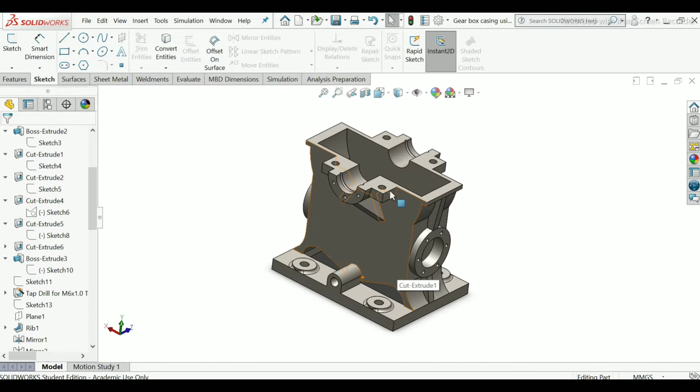I hope you have seen this 3D model that I have already made. Here are some dimensions given below so that you can see it. Let's start to make it.

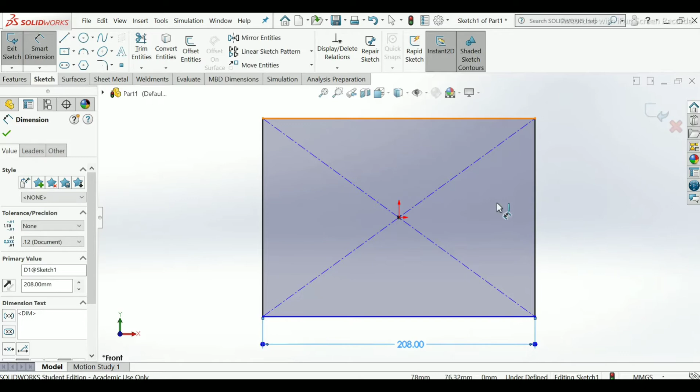Click new part. Select front plane, sketch, normal to profile. Click center rectangle. Apply dimension from here to here. Length will be 208 mm. Height will be 187.

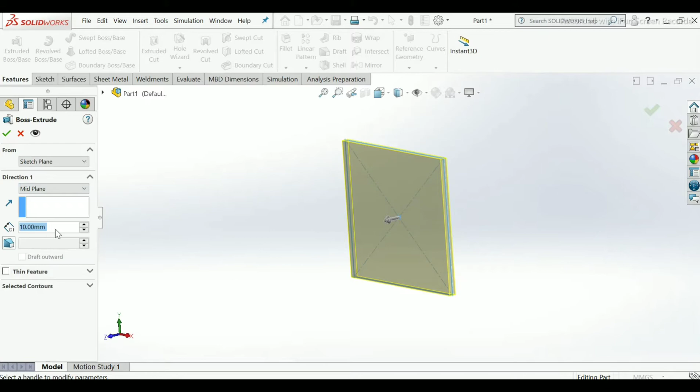Exit. Choose extrude boss base. Select start condition, end condition will be mid plane. Take 152 mm depth. Our preview has been seen here, you can see it.

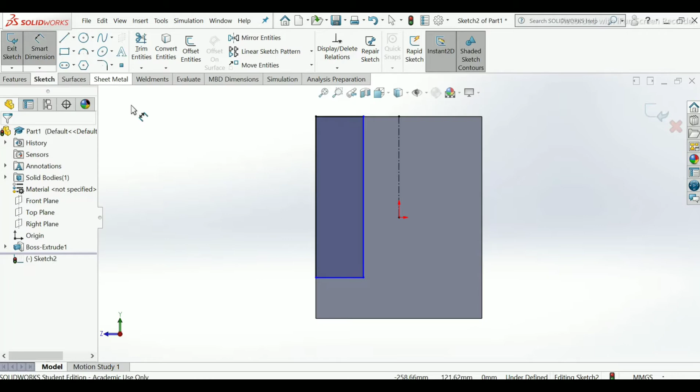Now click on this face, sketch. Take center line from origin. Draw one corner rectangle. Apply dimension. Take 167 mm and this 40 mm.

Click OK. Now we have to make this sketch on here, so I will choose mirror entities from sketch command manager. Select entities to mirror will be this corner rectangle, all lines, mirror about the vertical axis that I have drawn. Select this. Our preview has been seen here in yellow color lines. Click OK. See, it is been made. Now exit.

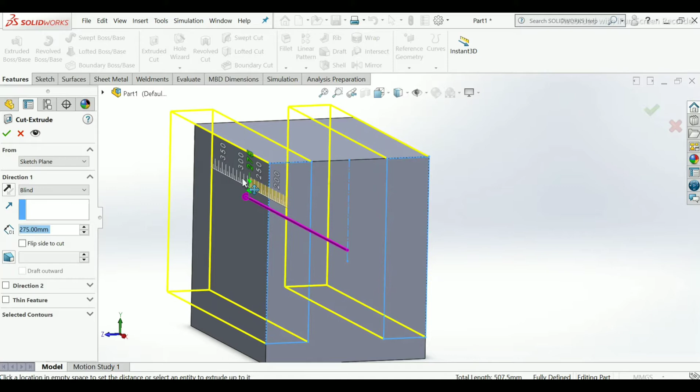Use extrude cut. Drag this arrow to here. Okay.

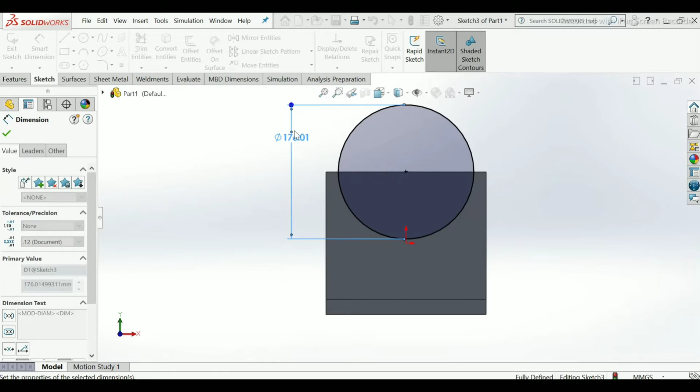Select this face, sketch, Ctrl 8. Select this circle, apply dimension. Take 192 diameter. Okay.

Drag anywhere, click OK. Make one rough sketch of a circle. Make it 80 mm diameter. Okay.

Now add some relations to here till here, so I will use add relations. Select this sketch and this vertex point, coincident. Okay. Again choose add relation, delete this selected entities. Select this arc diameter and this line, make it tangent. Our relation has been applied here.

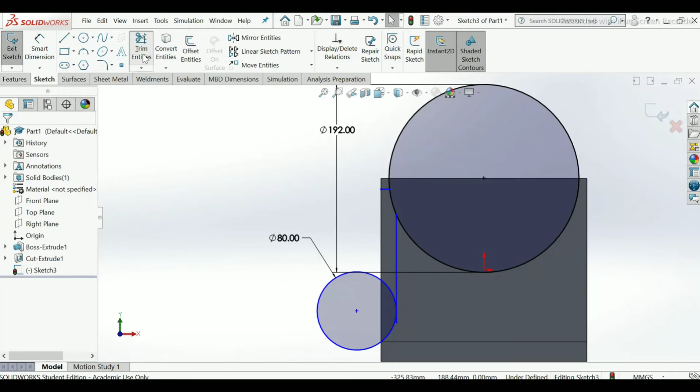Now use trim entities from sketch. Trim the lines. Make sure you will make one here also, a line. Actually it is not made. Now our line has been made. So use again trim entities. Trim this circle and this.

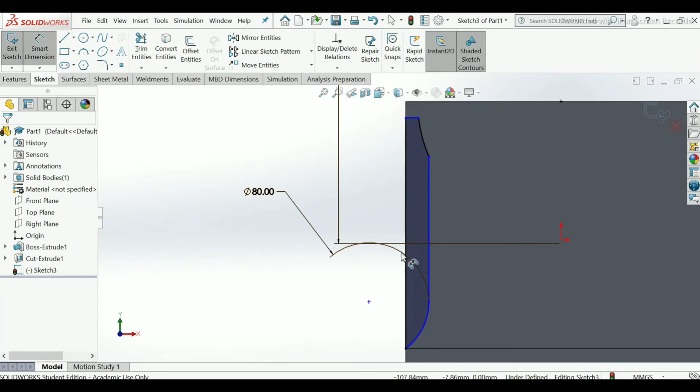Now our sketch is fully closed. Only we have to give dimension here. Take this edge and to this line, make 18 mm thickness. And from here to here take 6 mm. Okay.

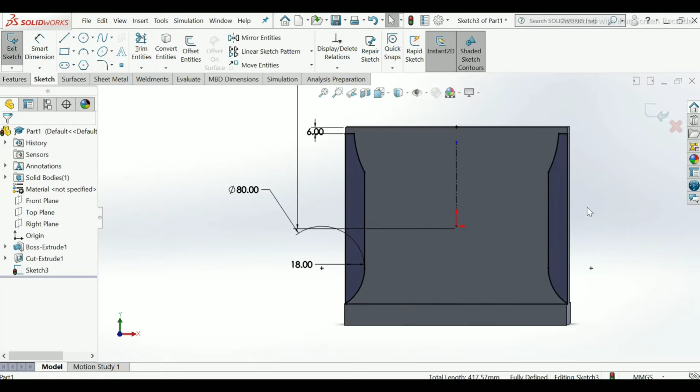Take center line from origin and stop here. We have to make this whole closed sketch to here. So mirror entities, select this sketch, mirror about axis, click OK. Now our copied sketch has been made from here to here. Now simply exit it.

I will use extrude cut, extrude through all, click OK. Now our outer side has been made.

Select this plane, sketch, use convert entities, select this edge and this edge, right click OK. Now offset this convert entities to here inside, so I will use offset entities, select this and this, make this direction reverse, click OK. Delete this 10 mm dimension from here.

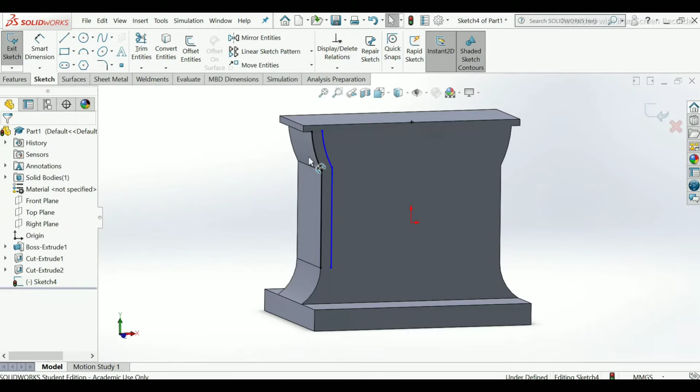Ctrl 8. Make one line from center of this origin. OK. Take 6 mm dimension, take line again, drag one point of the line to here. OK.

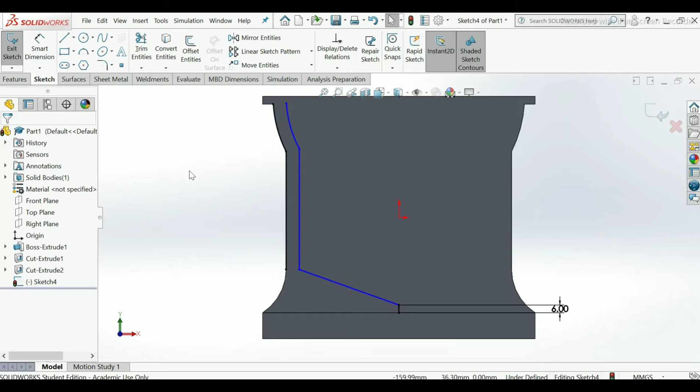Make one fillet, so I will use sketch fillet, select the point, make radius 6 mm, and click OK. Our sketch has been made.

Now again we will choose convert entities and select this top sketch, OK. Not trim, extend entities, we can extend all the lines from here, only choose this arc, right click OK. Use again trim entity, trim this line, OK.

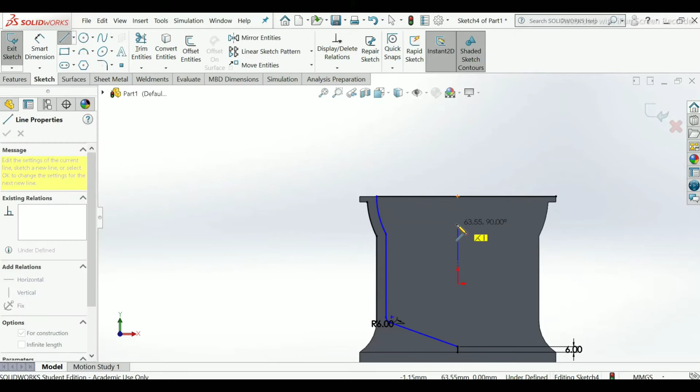Now I will make a center line from point of origin to here, so that we can mirror it easily. For mirror entities, select this arc, this and this, mirror about axis, vertical, OK. Now our sketch is fully closed, we just have to give one dimension, select this and this, make thickness 6 mm. OK.

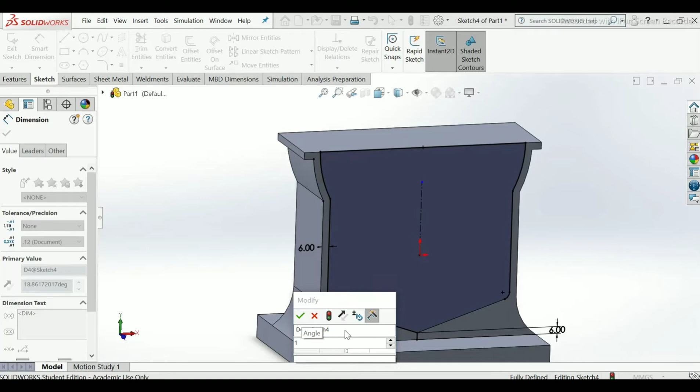Simply hide this and this, make it construction, OK. Make 19 degree, 19 degree, 19, because here we have to give another extrude cut to make a sketch of it, that's why I have given angle 19 degrees. So click OK.

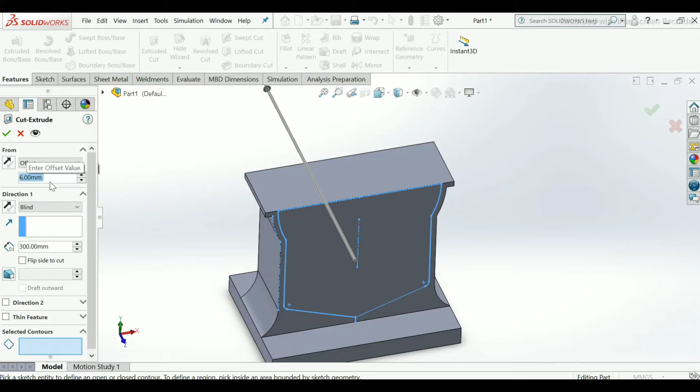Now we have to make extrude cut only in this portion, not through the whole model. So we will use extrude cut. Start condition will be offset 6 mm, select contour will be this, end condition select offset from surface, make 6 mm.

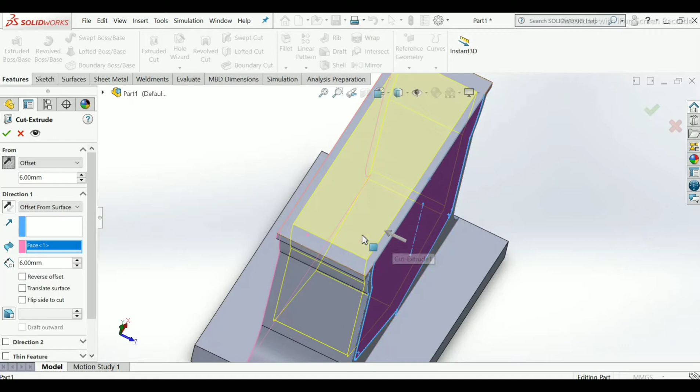Select a surface for this, so select this surface. Now it shows outward from it. Change the direction by choosing this that I have shown. So the direction has been changed to inside. You can see the preview, it cuts only this portion, not this. So click OK.

Now our extrude cut has been done. It cuts the material on the inside portion of the extrusion that I have made.

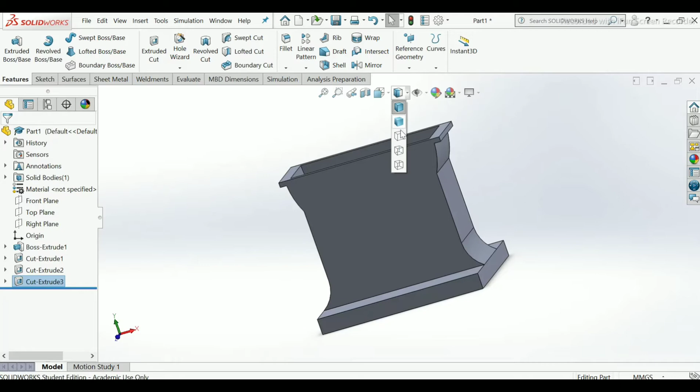So for this portion I have to cut it, so I will use display setting, change it, use wireframe. Select sketch, line, select line, center point, use convert entities for projection, click OK. Now give relation, make it parallel. Now use 3-point arc.

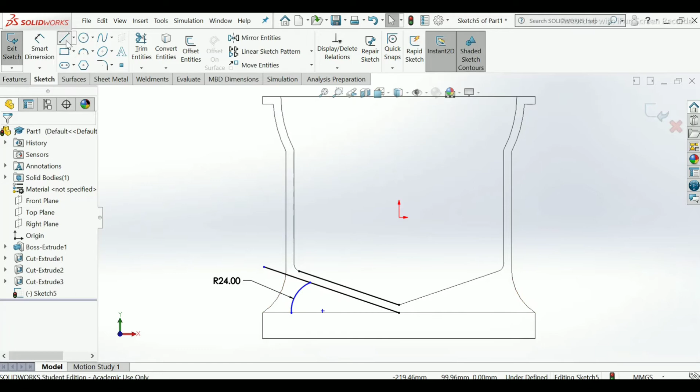Use smart dimension, make it 24 mm radius. Close this sketch.

Use trim. Now add one relation here. Make this and this line tangent.

Give length, it will be 84 mm. Simply you can drag it. Choose center line, select this arrow, center line.

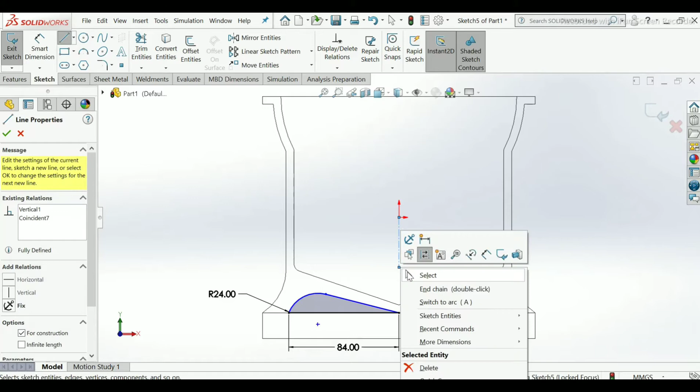Use mirror entities, select this sketch line that is closed, mirror about vertical axis. You can see the preview, click OK.

Now I have to give fillet here from this point, so use fillet, click this point. OK, now our fillet has been made.

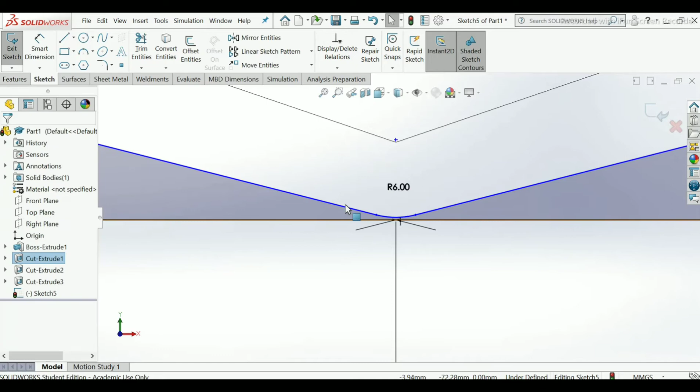Click OK. Use features, extrude cut, extrude end condition will be through all. Okay.

Now change the display style, make it shaded with edges. Our extrude cut has been made.

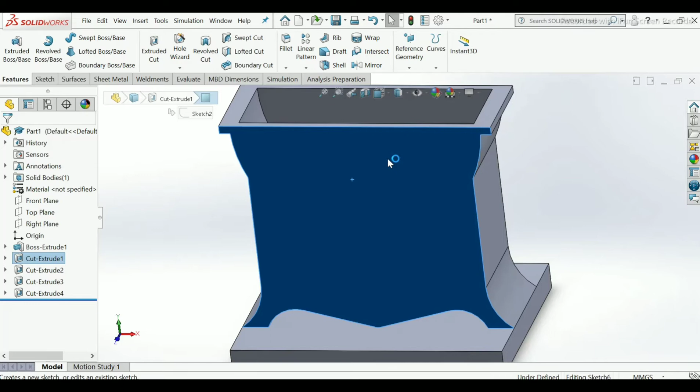Now select this face, sketch, Ctrl+8, make center line, apply circle to this point where center line has been started, make one line to divide this circle.

Now apply dimension, give 36 mm diameter. Okay.

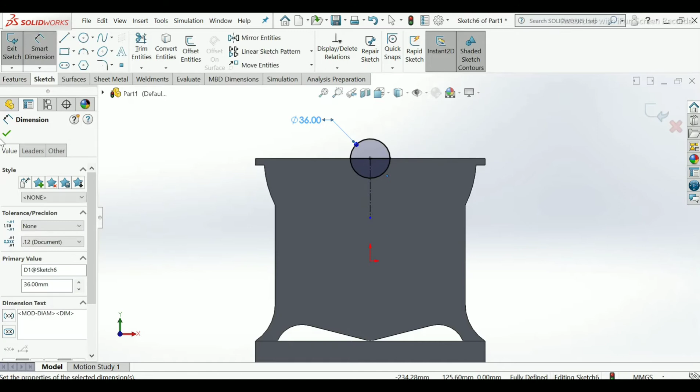Use trim entities, delete this half portion circle. Now we have to cut this portion by using this half circle, semicircle. So click OK.

And use extrude cut from features. Give end conditions through all. Okay.

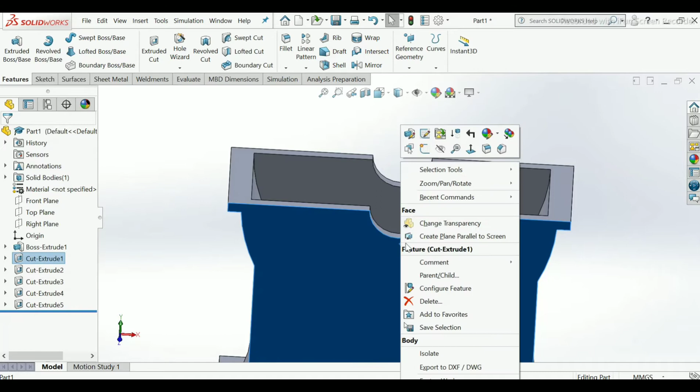Now we have cut this portion, so I will extrude this by using right click, sketch, control 8, use circle command, take center point of half semicircle, take line, draw one line from this point to this.

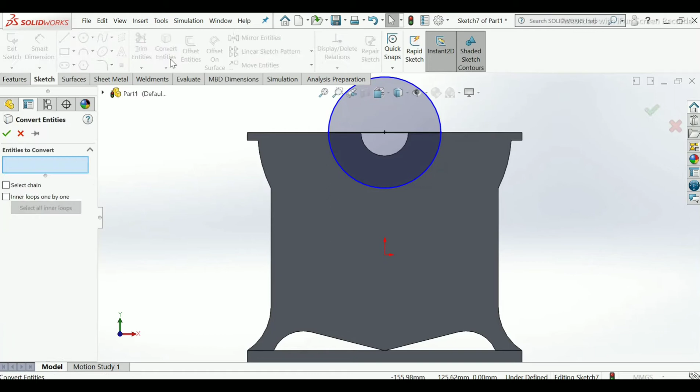Now then use convert entities, convert this semicircle for projection lines, click OK. Apply dimension to this bigger one, that is 64 mm diameter.

If you want to make radius, then you can make it by using right click this dimension, display options, display diameter or display as radius. Now it converts the radius of 32 mm.

Then use trim command again, trim this portion, then click OK. Now our sketch is completed, so exit.

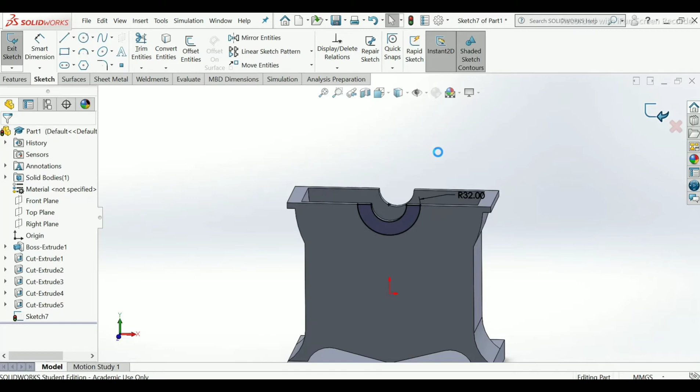Extrude boss up to 40 mm, click OK.

Now use this plane, sketch, control 8, normal to profile, which means use circle, start from this point that I have shown. This is the center point of both the extruded and extrude cut circle that I have made.

Make this circle as construction. Click OK. Apply dimension to this, 49 mm dia. OK.

Choose point from sketch. Give it to this constructed circle that I have created, to make this fully defined.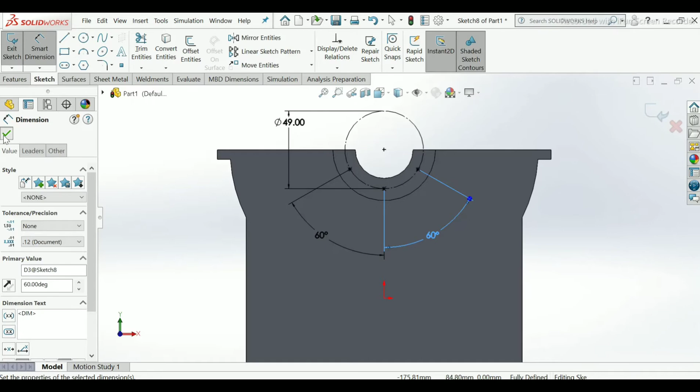Select this point and this, and this third point. Again make 60-degree angle. Click OK. I have made this point to give a hole wizard.

Now go to hole wizard. Select hole. Standard will be ANSI metric. Type will be tap drills. Size select will be M6 into 1 into 1.0.

We can see here custom sizing of it that given.

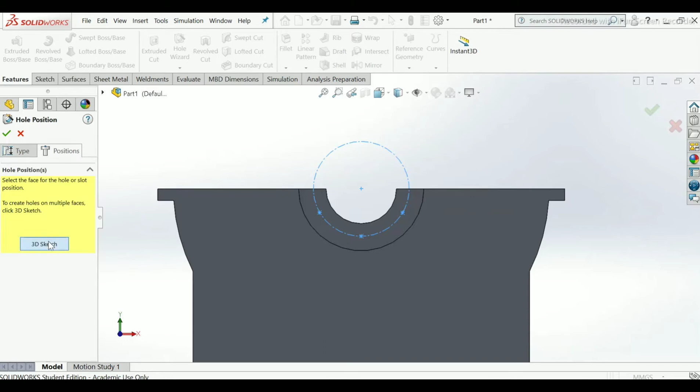Now use position 3D sketch. Now our hole has been created. We have to simply place this on points that I have created earlier.

Select this point and this, and last one is this. No, actually it is wrongly placed, so now our hole has been placed properly.

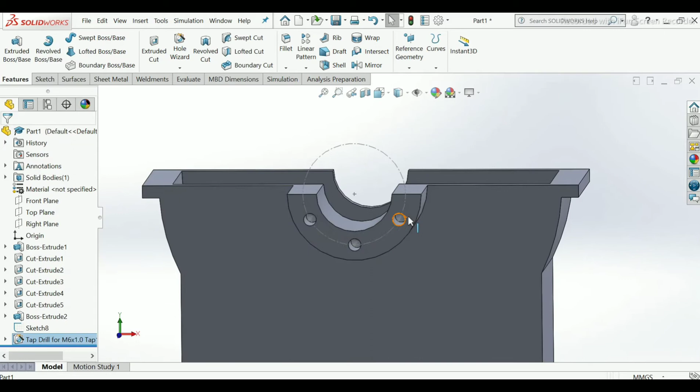Now simply click OK. Our holes has been made. So hide this sketch.

Use this sketch. Use this plane sketch. Control 8. Use convert entities. Use this edge. Click OK.

Use line command. Draw this type of sketch that I have shown you. Use trim entities, trim this edge. Now our sketch is fully completed.

Give the dimension. Make thickness 14 mm.

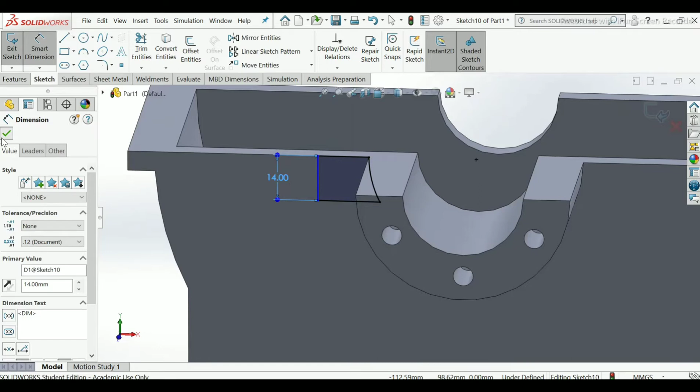Use this and this. Divide this from 92 by 2, that is 46. Mm, 46 will be small, so take 49.

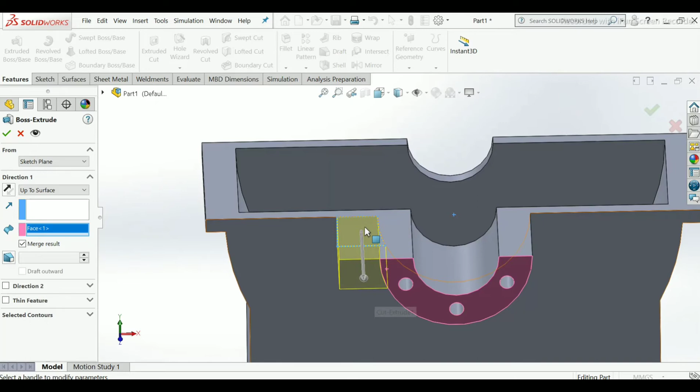Now simply do exit, extrude, up to surface, select this surface so that it will create extrusion. Click OK.

To make here also I will use mirror entity. Our boss is selected. Choose mirror plane, so I will choose this right plane. See, it has been created, so click OK.

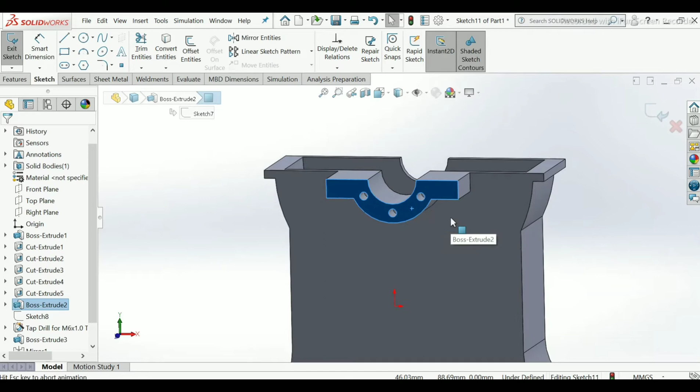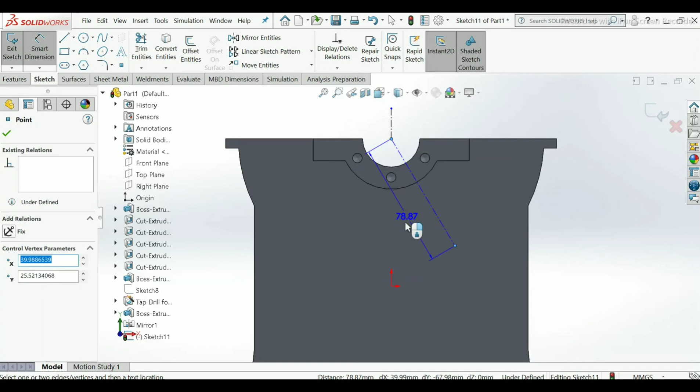Now choose this plane, sketch, take this center line, draw one line here, take smart dimension, make it as 70 mm. Choose this point and this point, apply angle, and this third one origin point, apply angle 30 degrees. OK.

Now exit, use reference geometry plane, take this point and this point. Now both the first reference has been selected. Use third reference as this, select this plane. Now our plane has been tilted, so click OK.

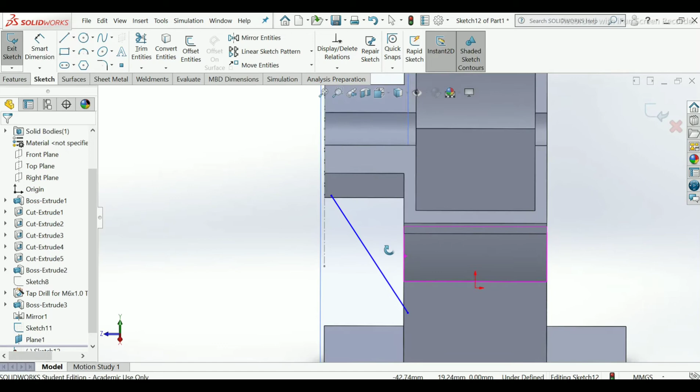Select this plane, sketch. We will make here a rib, so for rib I will choose one line, take line from anywhere so that the rib will create easily, otherwise it will take some time to make it. Now exit.

Use rib command, flip the material inside, thickness will be 10 mm. Click OK. Now our rib has been created. Hide this plane and this sketch.

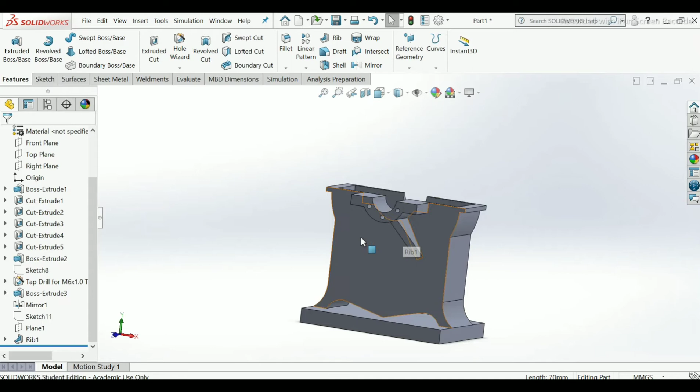I want the rib to be here, so I will make mirror, right plane, features to be mirror, select this rib, click OK. Now our second rib has been created.

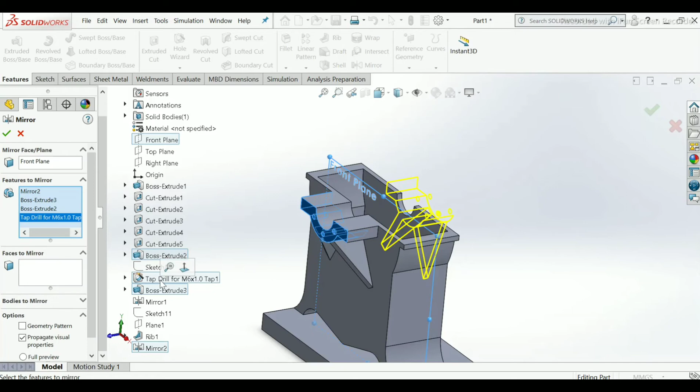I want this whole part to be here, so I will do again mirror, select mirror, front plane. Our rib mirror has been selected, so choose this and this, and this mirror 1. We have selected boss extrude, tap drill, boss extrude 3, mirror and mirror 2. Now simply click OK.

Actually this is wrongly placed here, so I will make changes here.

Okay, now again do mirror, select front plane, delete this boss extrude 1. I have selected this mirror, so click OK.

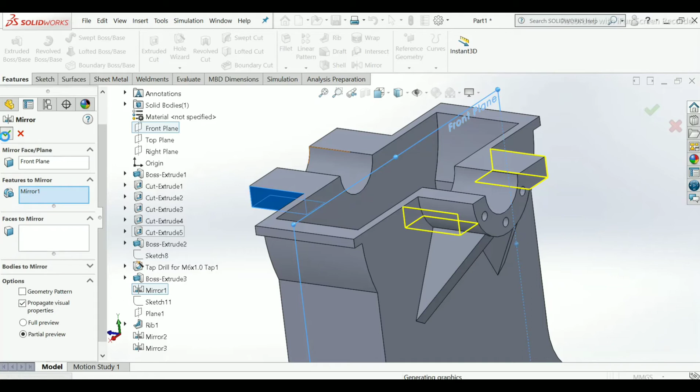If the mirror is not done properly, then choose this face, sketch. Use convert entities, select this edge, OK.

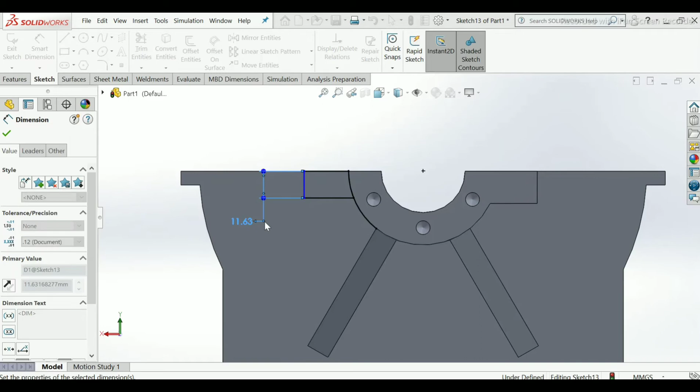Apply dimension 14 mm. Take this line and this, make it 49 mm. OK.

Now do trimming, use trim entities, cut that edge. OK. Exit.

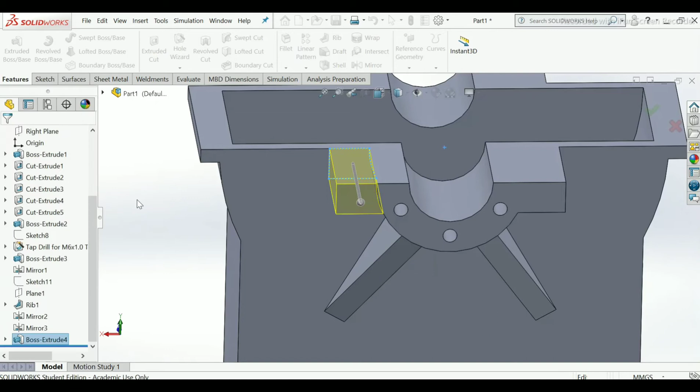So use extrude boss, extrude up to 40 mm. OK. So our this portion has been made.

Select this face, sketch, Ctrl 8, choose one center line, choose circle, use smart dimension, apply this circle diameter as 4 mm.

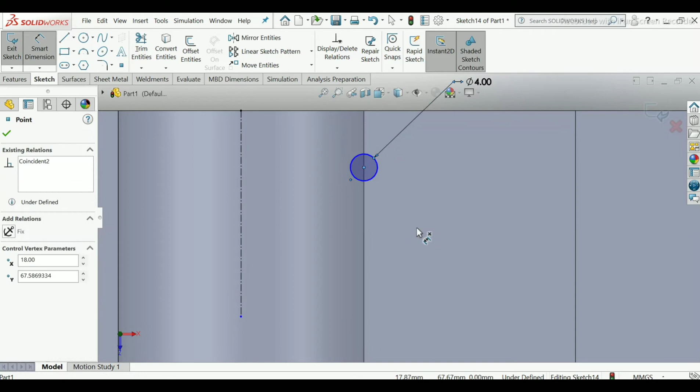Now select this point of circle to this edge line, apply 40 mm. Or you can make it 37 also. OK, click OK.

Use extrude cut, no sorry, use revolve cut. See, we have to cut this portion only to make it one ring. So click OK.

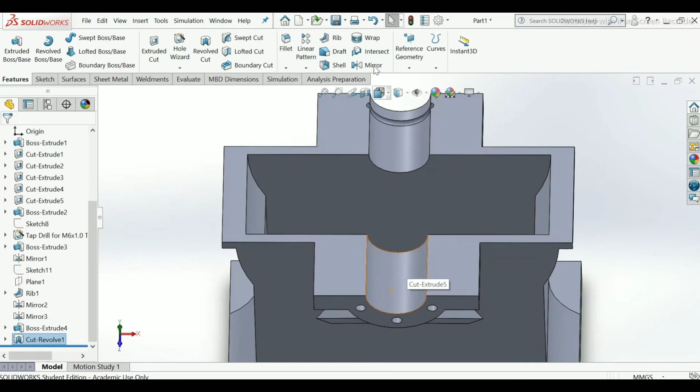Now our cut has been made. We have to make another cut from here also. So use mirror, select front plane. Now our preview has been seen here. So click OK.

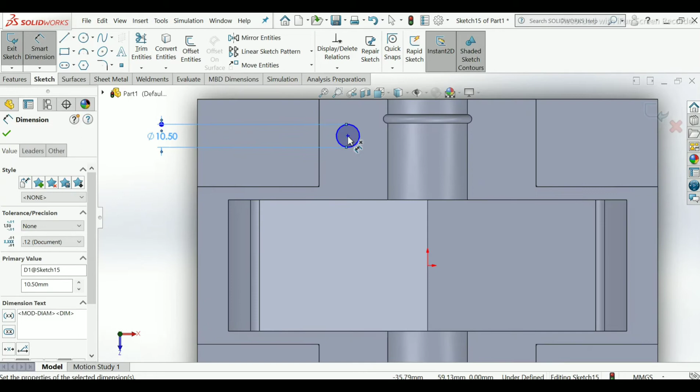From top face we have to make 4 holes here. So we will choose circle, take one circle here. OK, use smart dimension, give diameter as 10.5 mm. Choose this point and this, 12 mm.

Make 30 mm. Click OK. Now use extrude cut. OK.

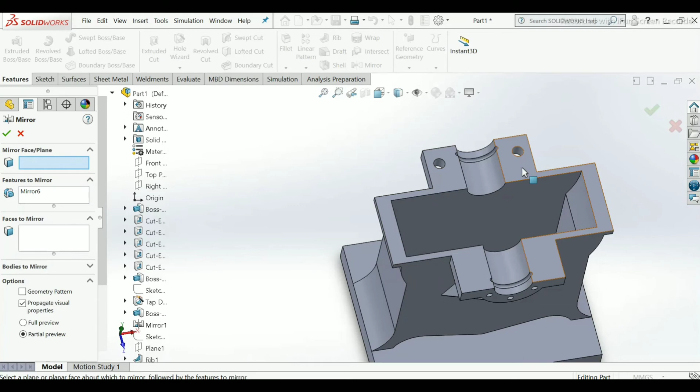We have to make 3 holes. One hole will be here, one and second will be here, and third will be here. So I will again use mirror, use right plane. OK. At one time it can do only these mirrors also. Use front plane. Mirror 6 is already selected of extruded cuts, so no need to worry about it. Click OK.

Now our upper portion has been done. Now we have to do one hole also here, so click this. OK, sketch, make one circle.

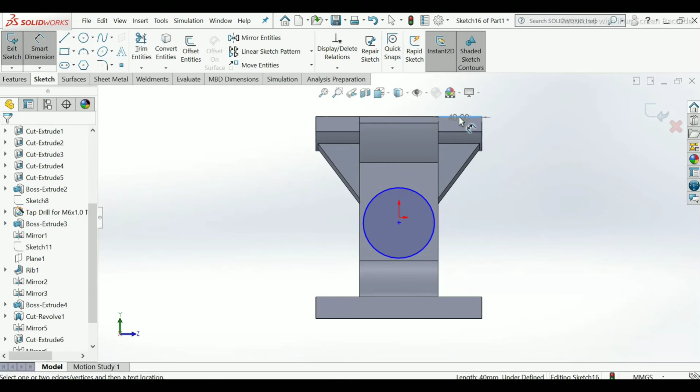Use smart dimension, select this edge, top edge, to this point, make it as 94.5 mm. Now select this circle, diameter will be 72 mm. Okay,

And make one circle here, smaller circle. Make 44 mm. Take this point and this point. So our sketch has been made.

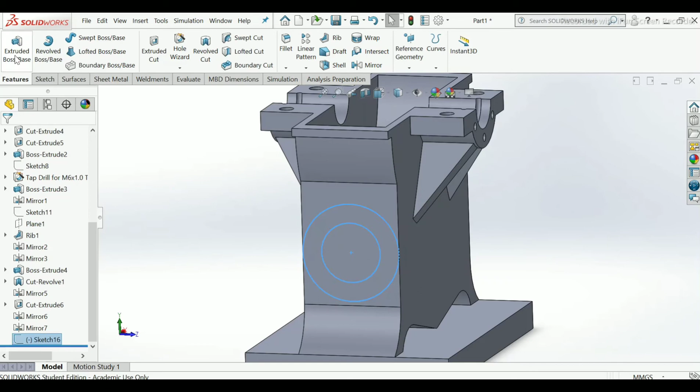Now simply go to exit, use extrude boss. End condition will be up to vertex. Select this point of vertex that you can see here. Select this. Now extrusion will be done up to this vertex only. So click OK.

But we have to make hole through all. So again select this arrow of boss extrude. Select this, show. Select this circle, convert entity.

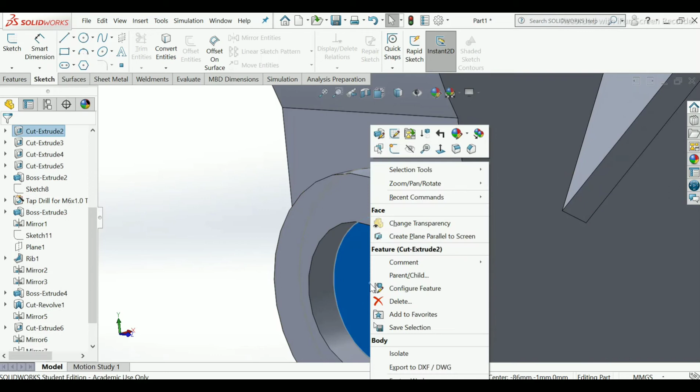For this select this plane, sketch, make this convert entity, use extrude cut, make through all. OK. Now hide these sketches.

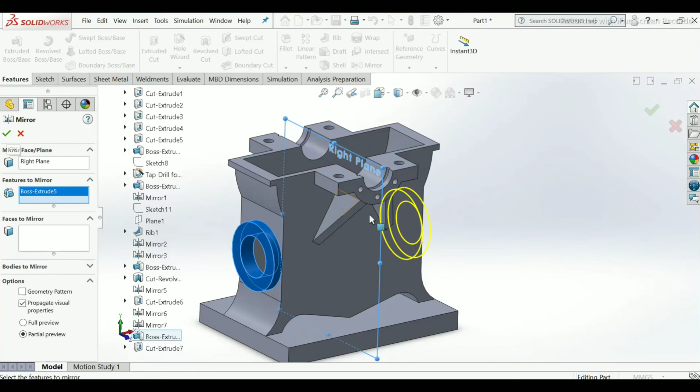We have to make also here extrude boss. Use right plane. You can see the preview of it. OK.

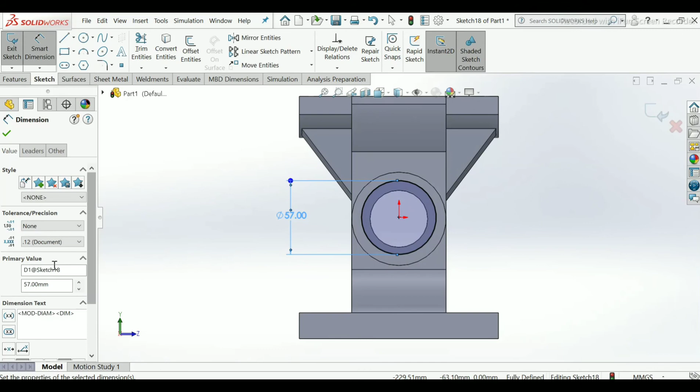Select this plane, sketch, select circle. We have to make a PCD of 57 mm dia. Take 57 mm dia. Make this circle as construction plane.

Take a point, choose here. Now use circular sketch pattern. Entity to pattern will be, select this point. Instances will be 6. Click OK. Now our points has been done. So click OK.

Again select hole wizard. Now this time the depth will be 12 mm. Take positions, 3D sketch, select the points that we have drawn.

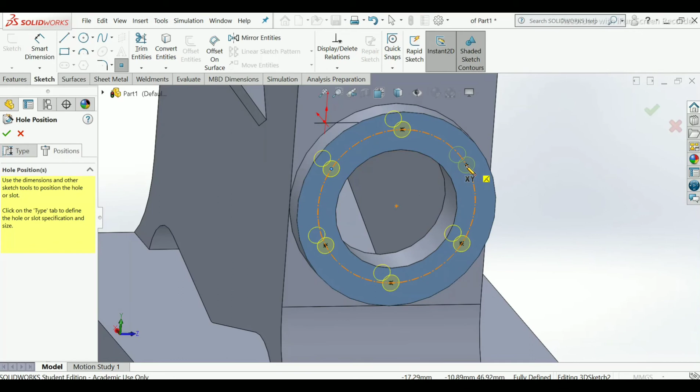Okay, now our hole has been created. Hide this construction circle.

Again we have to use mirror for this. Choose right plane. Use the tap drills that we have used. Now our preview has been shown here, so click OK.

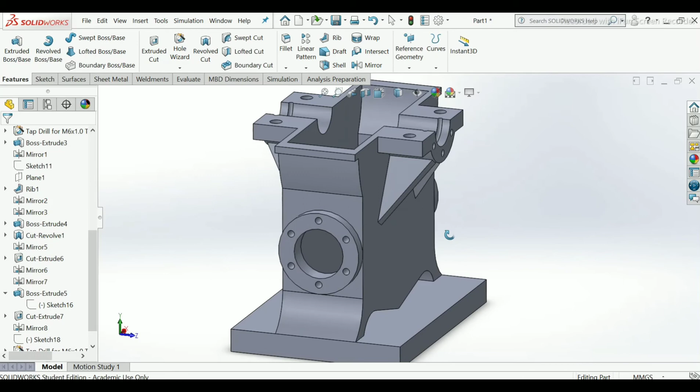Our model has been completed. Only we have to do this: select this plane, sketch, select line. Again we have to make a rib.

Okay, exit. Use rib command. Flip the material inside, but it is not from center, so I will delete this. To make it centered we will use the front plane, sketch,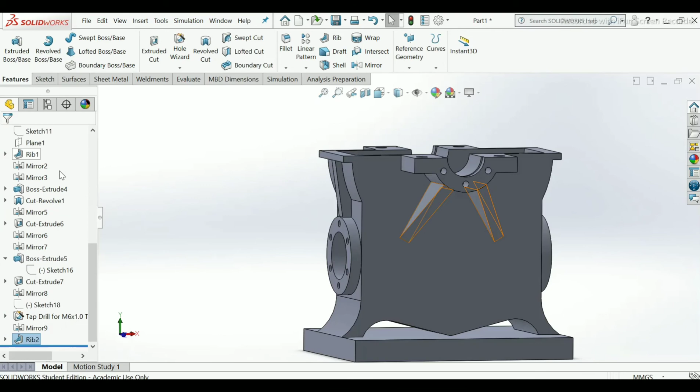select line from here to here. Exit. Use rib. Select flip the material inside. Thickness will be 10 mm and click OK. Now our rib has been made.

We have to make another rib here. So again I will use front plane, sketch, take line not from vertex, just go through outside. Okay. Exit. Use rib. Flip the material inside. Thickness will be the same as earlier. Click OK.

Now again choose mirror. Use right plane. We have to make the second rib also. Now our preview has been shown here, so click OK. Both the mirrored ribs have been done.

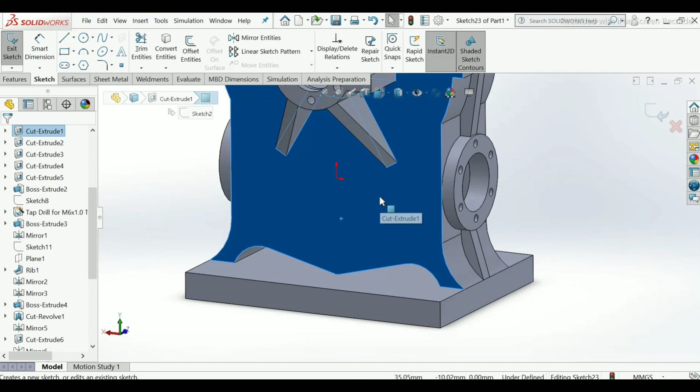Select this plane, sketch, make circle from the center line. Take smart dimension, make it 24 mm diameter. Make sure it will be from center only.

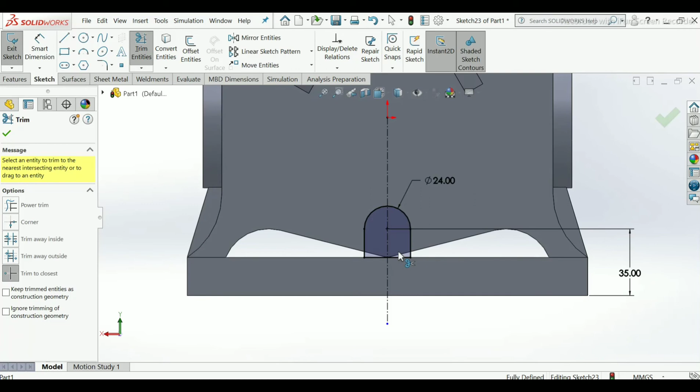Distance will be 28 mm. Make it at 35. Okay. Now use trim entities. Now our sketch has been closed, so click OK.

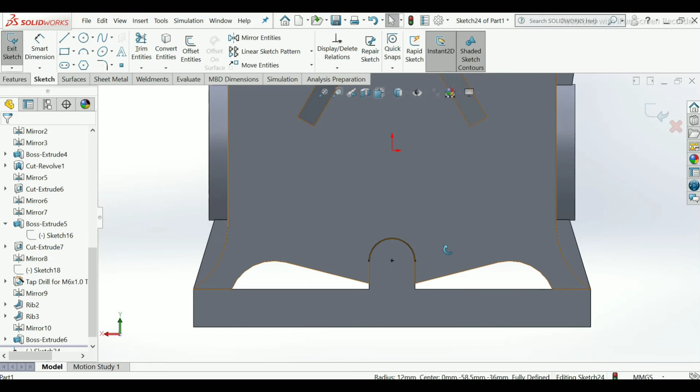Select this plane, sketch, use convert entities, use this, select this arc, click OK, make it a construction, exit.

Now again choose hole wizard, select this hole, and diameter will be 7.2. Depth will be 13.

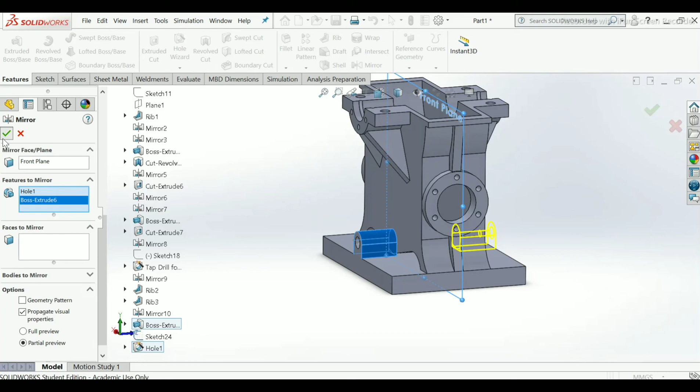We have to make another portion from here, so I will choose mirror again, use front plane. Our hole has been selected. For boss, I will choose this boss extrude, then click OK. Now hide this sketch. Our mirror command has been successfully done here.

Now our last step is here, extrusion cut from downwards, so I will choose this plane, sketch. Select center line, use line,

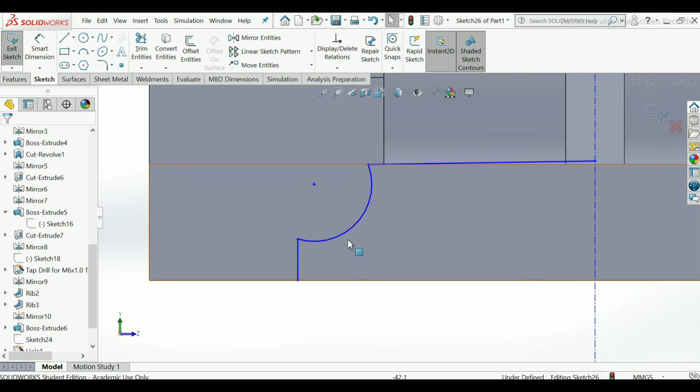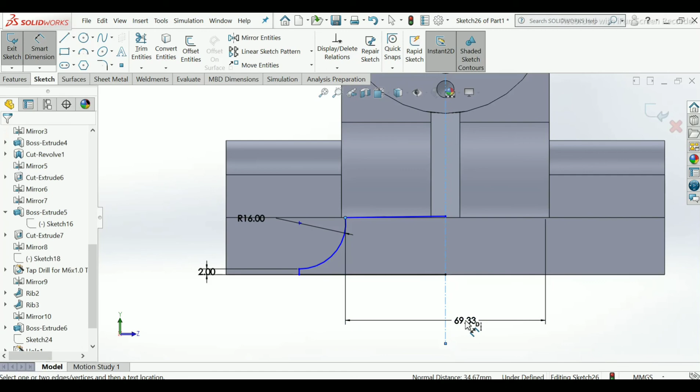use add relation, make it tangent, again add relation, make radius 16 mm, make this line vertical, select this, total line will be 68.

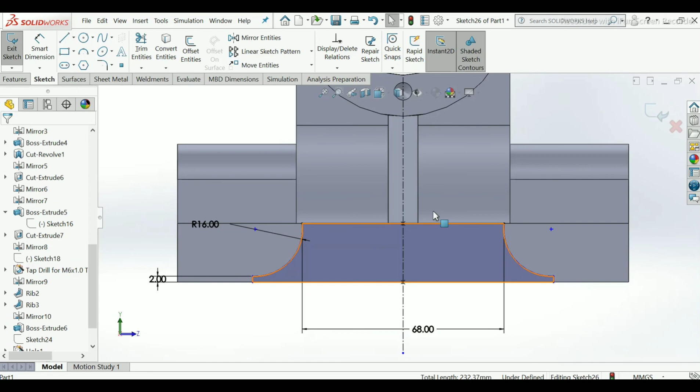Use convert entities, select this line, OK. Now trim it, extend up to here. Now use mirror entities again, mirror about this. Now our sketch has been fully sketched.

Exit, use extrude cut, use offset, six mm, change the direction, offset up to surface, offset from surface,

select the last surface of the bottom line, offset up to 6 mm. So preview you can see here, then click OK. Our extrude cut has been done here.

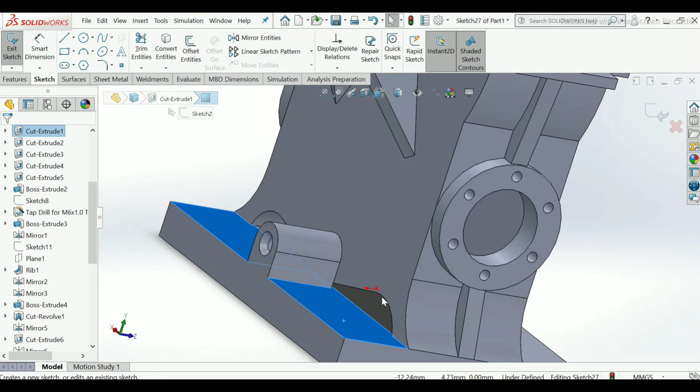Now our final step is to create some extrusion holes or extrude boss. So click sketch, select this bottom face, Ctrl 8, use circle, draw one circle. For another we will use mirror. Choose smart dimension, apply this and this.

Make a diameter 32 mm. Sorry, it is distance. Make 16 mm. I think it's just near to it, so make it 20. Or you can make it 25. Yeah, that is okay.

Now take diameter 32 mm. Okay. Exit. Use extrude boss. Extrude up to 4 mm. Okay.

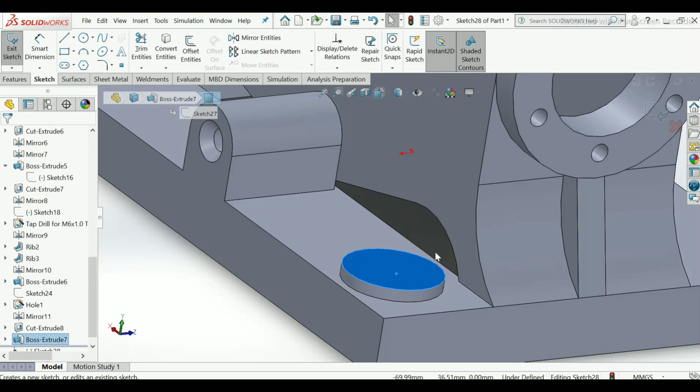Select this top surface of extrude boss. Click OK. Choose 12.5 mm diameter. Make it construction. Extrude up to all. Click OK.

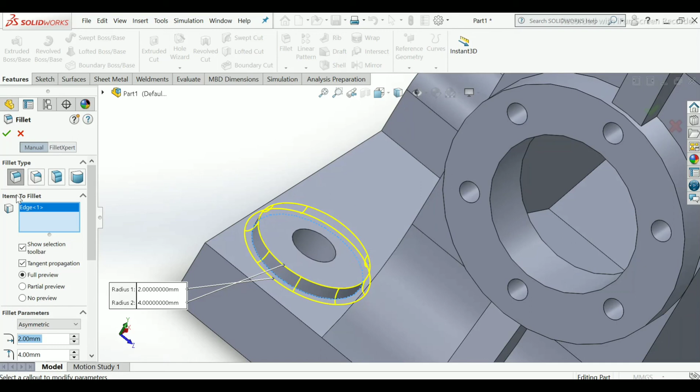Now give here a fillet. Radius you can give 2 mm. So click OK. Select this sketch, this edge. OK.

Now our last step is to use mirror again. For features to mirror we have to select this boss and extrude cut. Also use mirror. Mirror plane will be front plane. Okay. Again use mirror.

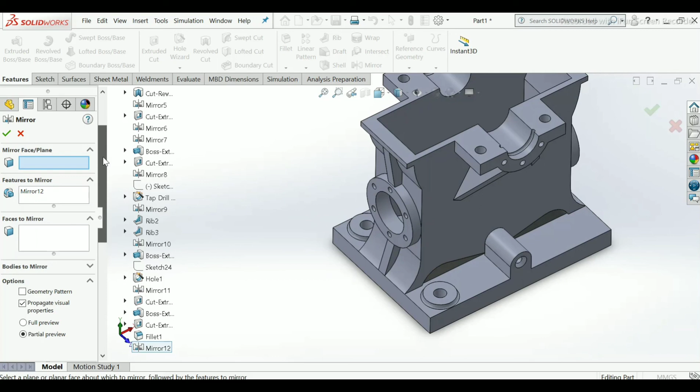Now this time select right plane. Both the geometries have been selected, so that we can apply our material here. So click OK. So our model is fully finished. It is very lengthy, but you can make it, I'm sure.

You can give it material by using material not specified option. Right click, edit material. I will prefer steel cold rolled. Then OK. We can see all properties of this material shown here. So I apply it. Closed.